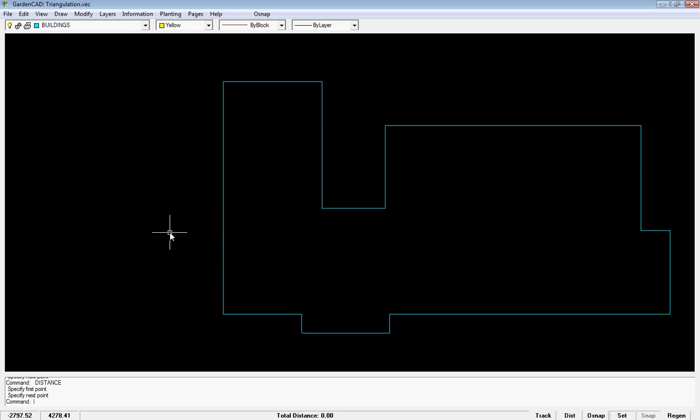Before we do that, let's right click and go to drafting aids, and I'd suggest that you set up a 1 meter grid over the site, and we'll put the grid above the drawing or below the drawing, whichever you like, doesn't matter. And also set up polar tracking and enable the polar tracking, put it on, and a distance step of 100. So when we move and copy entities to offset to a boundary, it'll go 100 mil at a time. You'll see it in operation now.

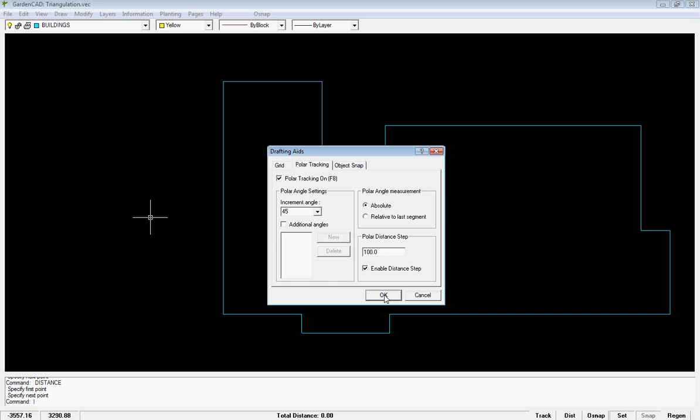So we'll put our grid on. F7 is the function key shortcut to do that, and we set the step size at 10. So each one of these dots here represents a meter, and that's 10 meters between the major grid points. And we started at 0, 0, so X runs off to the right, Y goes up to the top. If we were doing 3D work, Z would come out of the screen towards us, but I digress.

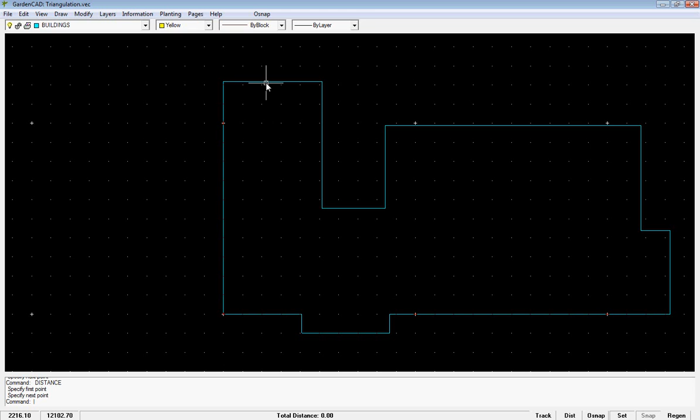We know that this side of the house here is 1515 mil to the side boundary. So what we're going to do is zero in on this. I'll pan down a little, and we just want to copy that to make a construction line. So we'll set object snap to the midpoint, which we've done. Now we select that line, right click, copy.

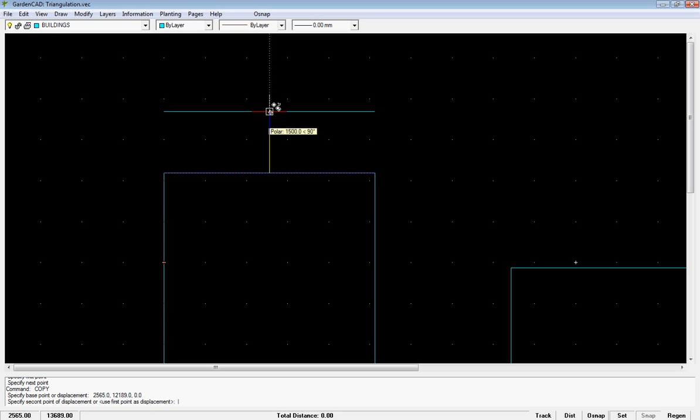Because object snap midpoint's on, it finds the midpoint of that, and tracking's on, so we can go 100 mil at a time. If we stay with the yellow marker on, we're going off at the moment 1500. We want 1515, so the boundary is going to be up here. Now, although that says 1500, we go 1515 and hit the enter key. So now we've got our top boundary set. It's just a construction line.

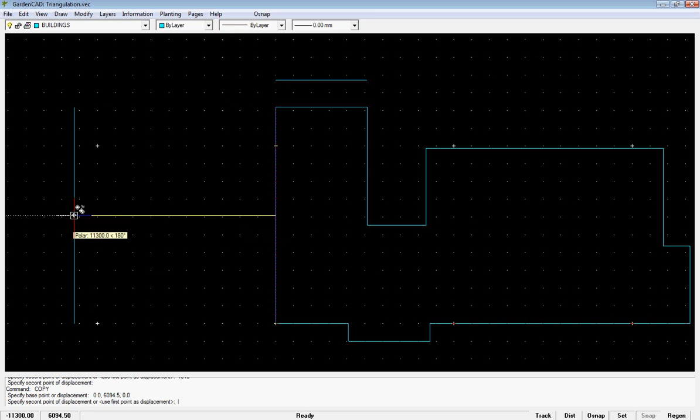The back fence, in this big site, the back fence is 14.6 meters off from the back of the house. Same deal. We go snap mid. It's staying. We set that before, so we can just select this. We can copy, pick up by the midpoint, and head off in this direction. Keep tracking on, and it's 14,600, and hit enter, and enter. Right click to finish. So there we have the back fence and the side fence.

We can then extend; we just need to set a couple of dummy lines. We'll just draw a line out here. It doesn't even have to be horizontal, but we will. And another line out here, like so. Then we can go modify and extend. This can be the boundary, and we're going to extend that line to it and repeat that command. This can be the boundary, and we'll extend that line to it.

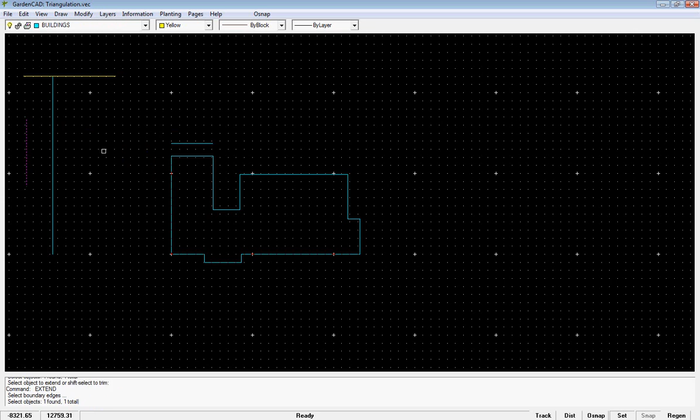Now we just need to trim this corner off. That's modify and trim, and that can be a cutting edge, that can be a cutting edge, and we can knock off that bit and knock off that bit. So now we have the back corner done. So we just offset this side, offset out to the front, and we'll be able to locate our boundaries.

I'll just turn on a layer to show you that has been done, and you can see there the white lines represent that as we continue on in this vein. So you can see, setting up a rectangular site and locating the building on that site is just a matter of offsets.